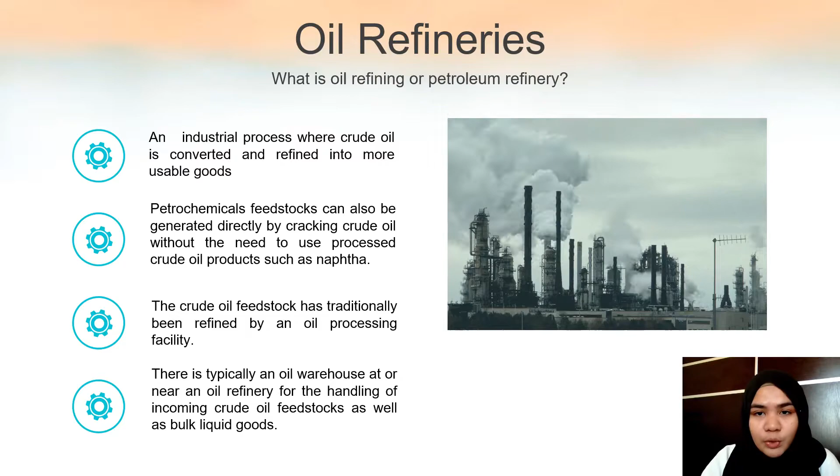Hi, I'm Farah. So first of all, allow me to explain what is oil refineries. Oil refineries is an industrial process where crude oil is converted and refined into more usable goods. It is considered an essential part of the downstream side of the petroleum industry.

The project chosen for our assignment is one of the biggest investments of Petronas, which is Refinery and Petrochemical Integrated Development Rapid Project. It is along with other related facilities that are part of the PIPC, which is Pengerang Integrated Petroleum Complex. This is a joint venture of Petronas and Saudi Arabia National Oil Company, which is Saudi Aramco.

The project started in 2013 and finished by the end of 2019. The project has achieved a total of 8,600 jobs in the operational phase by year 2020.

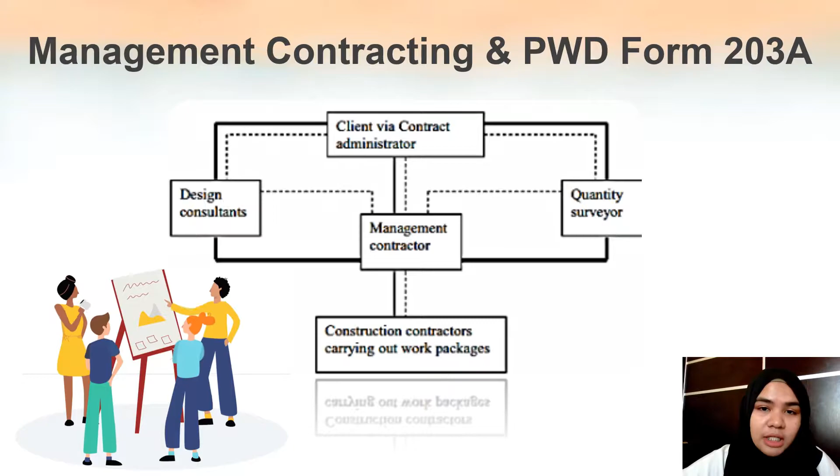The procurement system used for this project is Management Contracting and PWD Form 203A. A contract is between a management contractor and a work contractor. Specialized contractors and suppliers will of course be needed, contracted individually and managed by the management contractor.

Here is the location where the project has been built: Pengerang, Johor. The site was chosen because of its location along major shipping routes between the Middle East and China. With an area of 80 km, it comprises oil refinery, naphtha cracker, petrochemical plants, liquefied natural gas terminal, and regasification plant.

The project successfully finished with the cooperation of Petronas as main client, Tecnicas Reunidas awarded EPCC for refinery package, Fluor and Technip joint venture who supplied hydrogen reformers, Dialog Group Berhad, a leading integrated technical service provider to the upstream, midstream and downstream sector, while Royal Vopak, a Dutch multinational company that stores and handles various oil, chemical, edible oils and natural gas related products, and Axens, who provide naphtha hydrotreating, octanizing Prime K, R2R, and Prime G+.

Binapuri Holdings and Dasco are responsible for the civil works in the steam cracker complex. Samsung Engineering received EPCC contracts for its LLDPE and ethylene oxide ethylene glycol plants. ATB Group helps in providing ARDS reactors. Punj Lloyd, an Indian engineering procurement and construction contractor providing services for energy, infrastructure and defense sectors, while Johor Port Berhad supply manned services, manpower, equipment and system.

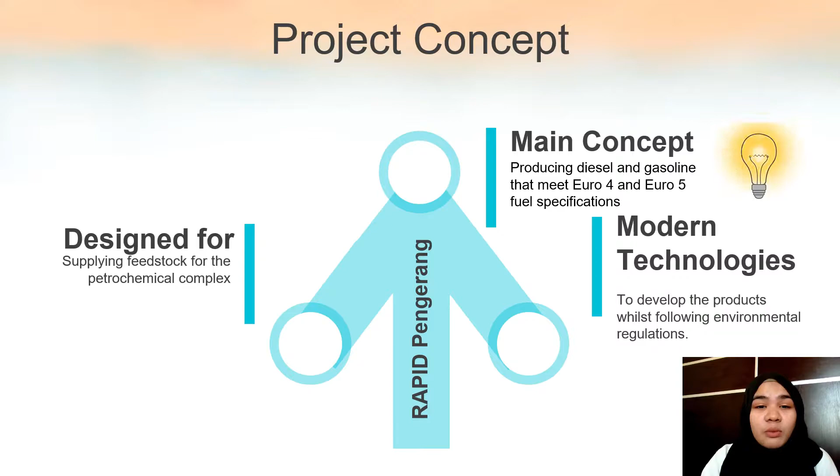The main concept of Rapid Pengerang is to produce diesel and gasoline that meet Euro 4 and Euro 5 fuel specifications using modern technology but still following environmental regulations. Next, I will pass to my dear friend Ellie to continue the technique used in constructing refineries.

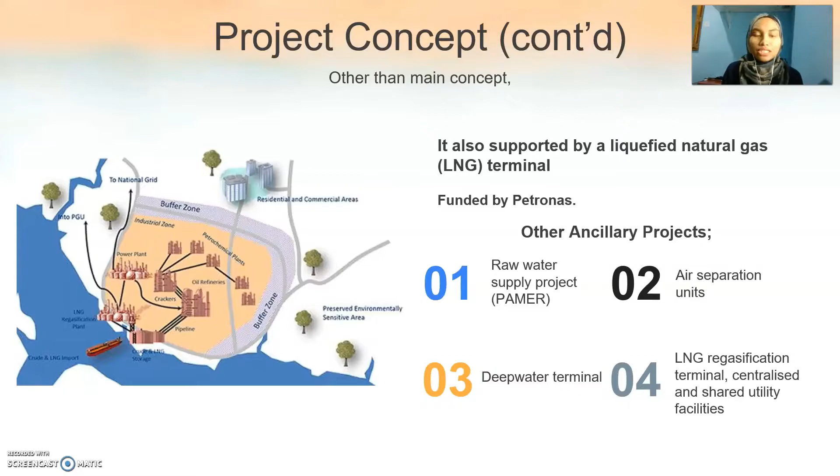Other than that, it is also supported by a liquefied natural gas LNG terminal which is funded by Petronas. Other ancillary projects are raw water supply project, air separation units, deep water terminal, LNG regasification terminal, centralized and shared utility facilities. This is the basic refining flow.

There are three main sectors in the oil and gas industry, which is upstream, midstream, and downstream sector. Upstream sector is located at sea inside the national border. The main part of this sector is exploration, drilling, and the production of crude oil. It is a process from getting a raw material to a refinery.

Midstream sector involves the transportation, storage, and gas processing. Pipelines are the most economical method to transport crude oil across long distances. Storage tanks will be used to store the petroleum product, while depleted reservoirs will store the natural gas.

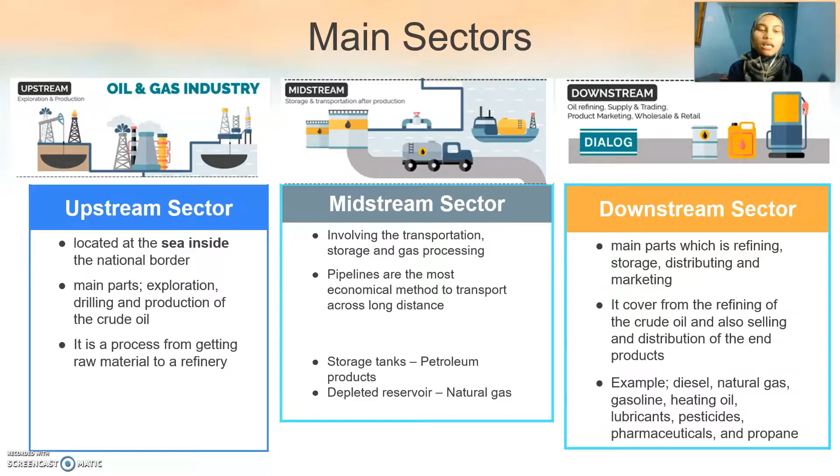Lastly, the main part of the downstream sector is refining, storage, distributing, and marketing. It covers from the refining of the crude oil and also selling and distribution of the end product. Examples are diesel, natural gas, gasoline, heating oil, lubricants, pesticide, pharmaceuticals, and propane.

Drilling oil requires drilling through the layers of the earth's surface to reach hydrocarbon deposits. Drilling takes place onshore, below the earth's subsoil, and offshore, below the seabed.

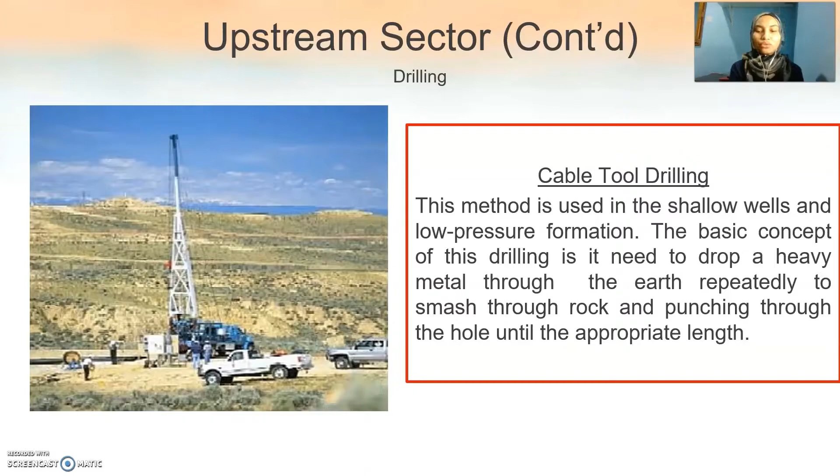There are two techniques for drilling. First is cable tool drilling, used in shallow wells and low pressure formations. The basic concept is to drop a heavy metal through the earth repeatedly to smash through the rock and punch through the hole until the appropriate length.

Next is horizontal drilling. Horizontal drilling is more flexible, allowing natural gas exploration that is not otherwise feasible. On the surface it has a vertical well, but beneath the surface the well inclines so that it runs parallel to the natural gas formation.

This is the technique for pipeline installation. Firstly, we construct the staging area, which should be clear, with the storage yard placed along the proposed right-of-way. Next, clear cutting the right-of-way: trees are cut and burned, and a stump grinder removes the remaining tree stumps. Then, excavating the trench for the pipeline after site clearance is done. Next are pipe transport, stringing and assembly, obstacles, and testing and restoration.

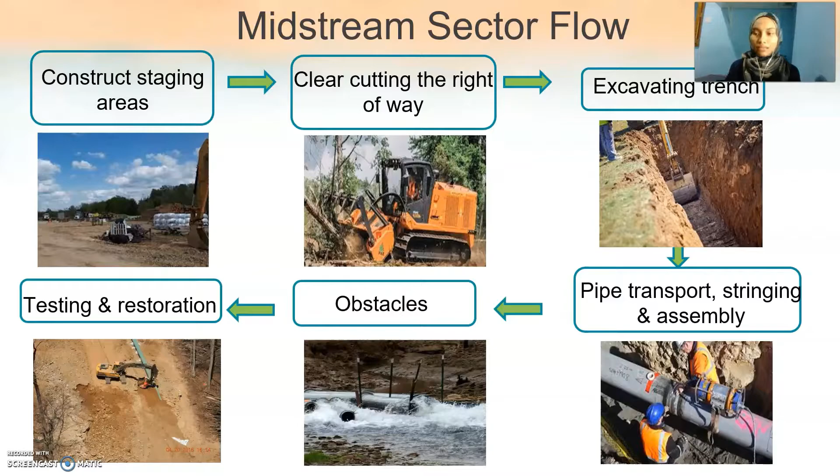Pipe transport, stringing, and assembly. When the trench is finished, pre-coated pipe lengths, usually 12 meters, are moved from the storage area to the right-of-way. The pipe parts are welded together, sandblasted, and epoxy coated at the welded joint to avoid corrosion. The welding joints are then tested with X-rays to ensure their consistency. The linked pipeline is then lowered into the trench.

Obstacles. Pipelines may cross natural bridges, highways, waterways, or wetlands. Under these barriers, pipelines are usually built either by boring for shallow depth or by using horizontal directional drilling (HDD) for deeper positioning. Each challenge involves a specific approach and order of action.

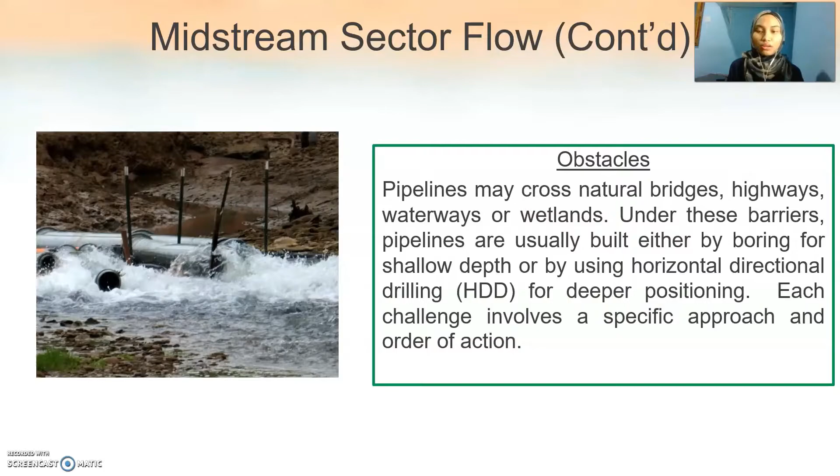Lastly, testing and restoration. Once trenches are dug and pipes are transported to the staging area prepared by the construction workers, pipes are laid down beside the trenches. Pipe sections are then bent using pipe bending tools, welded together, sandblasted, and joints are coated to prevent corrosion.

We proceed to the methods to test the tank foundation.

As Pengerang Rapid has many huge storage tanks, it is vital to test the tank foundation, which is the base to support the weight of the tank and contain spillage. It is required to test each 0.3 meter thick layer of placed and compacted material using one of these methods: nuclear density gauge method, core cutter method, sand replacement method, and plate load test.

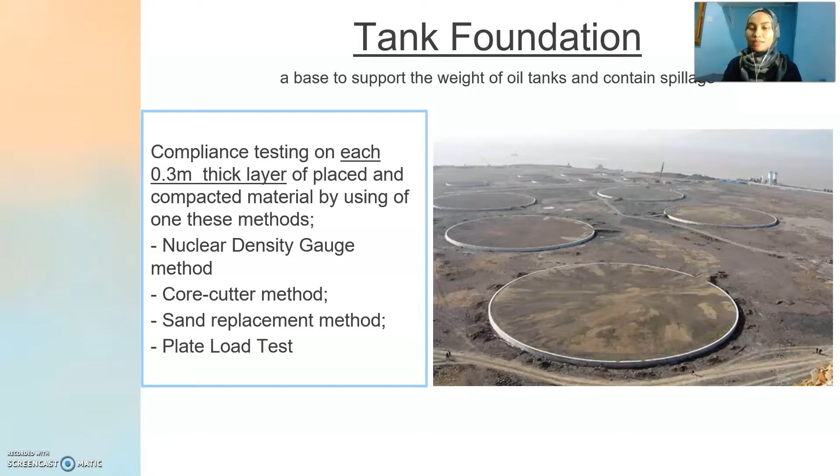Nuclear density gauge method. Nuclear densitometry is used to determine the density and inner structure of the test material. It consists of a radiation source which emits particles and a sensor that counts the particles obtained, whether reflected or passed through the test material.

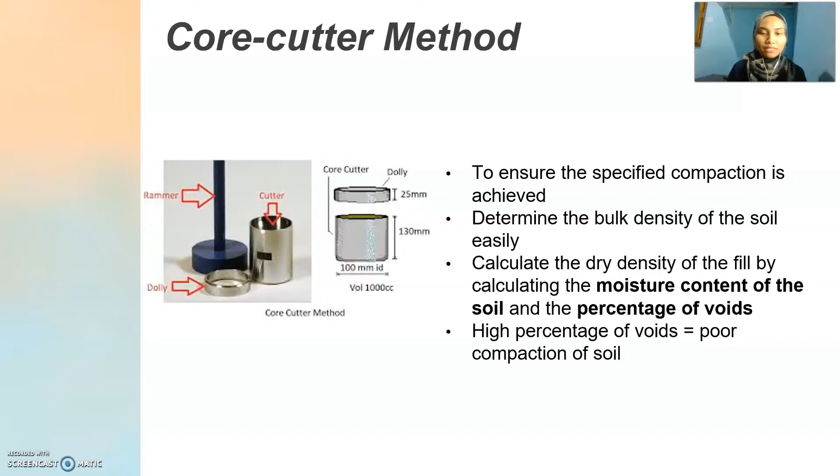Next is the core cutter method. This method ensures the specified compaction is achieved and determines the bulk density of the soil easily. It calculates the dry density of the fill by calculating the moisture content of the soil and the percentage of void. A high percentage of void indicates poor compaction of soil.

Next is the sand replacement method. It can measure the in-situ volume of the hole when the material was excavated, from the weight of sand with known density filling the hole. It can assess the in-place density of the compacted soil and specifies how similar the soil compaction is to the designated degree of compaction.

Lastly is the plate load test. It determines the ultimate bearing capacity of the soil and the probable settlement under a given load, and is suitable for selecting and designing shallow bases. The steps are: firstly, the plate is mounted at the desired depth, then the load is applied rapidly. For each load increment, the settlement is reported. If settlement occurs, the total load up to that point is calculated and divided by the area of the plate.

Therefore, one of these methods can be used to test the tank foundation.

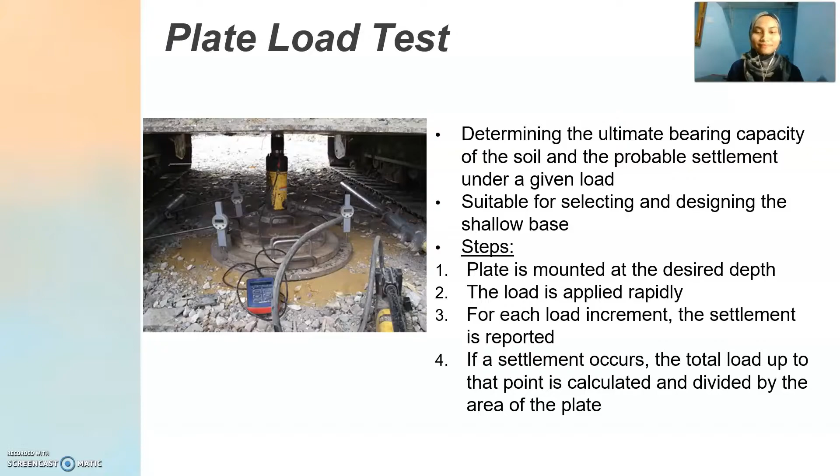Next, I will present about the types of oil refinery.

There are 4 types of oil refinery: topping oil refinery, conversion oil refinery, hydroskimming oil refinery, and deep conversion refinery. The type of oil refinery used at Rapid Pengerang is deep conversion refinery.

First is topping oil refinery. It is the simplest refinery configuration. It consists of tankage, a distillation unit, recovery facilities for gases and light hydrocarbon, and necessary utility systems such as steam, power and water, and a treatment plant. It can produce a large quantity of unfinished oil and is able to produce more than half of their output as residual oil. However, this type of oil refinery is not preferable because the demand for high sulfur fuel oil is declining.

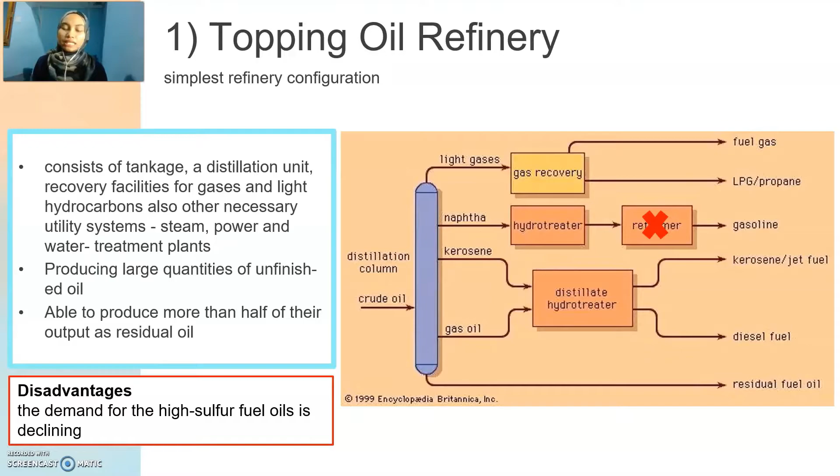Next is hydroskimming oil refinery. It consists of only atmospheric distillation, reforming such as naphtha reforming, and hydrotreating. It is more complex than topping refinery. It produces naphtha and gasoline and has the catalytic reformer, which generates higher octane reformate and hydrocarbon for hydrotreating units. However, this oil refinery produces a surplus fuel with no relative price and demand.

Next is conversion oil refinery. It is the most versatile refinery configuration. It consists of all the building blocks. It has a feature of gas oil conversion plant such as alkylation or polymerization unit, and coking units to reduce the production of residual fuel. It is able to produce 2/3 of its output as gasoline, high-quality jet fuel, liquefied petroleum gas (LPG), diesel fuel, and a small quantity of petroleum coke. The solvent extraction processes can turn into manufacturing lubricant and petrochemical units into polymers.

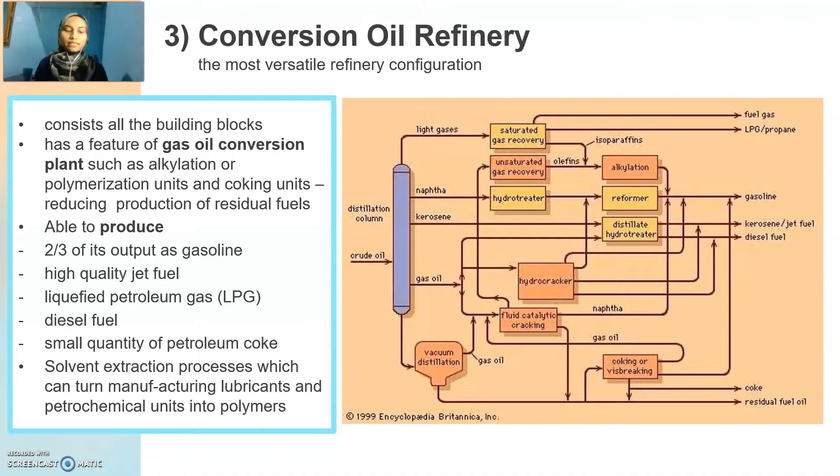Lastly is deep conversion refinery. It is a special class of conversion refineries. It has coking units to destroy the heaviest and least valuable crude oil by converting them into lighter streams, which will then serve as additional feed to other conversion processes. It has upgrading processes such as catalytic reforming that produce more valuable light products.

At Rapid Pengerang, the refinery has the capability to process 300,000 barrels per day and is complete with an isononanol plant, steam cracker, 3 sulfur recovery units, liquid sulfur storage unit, and sulfur solidification unit.

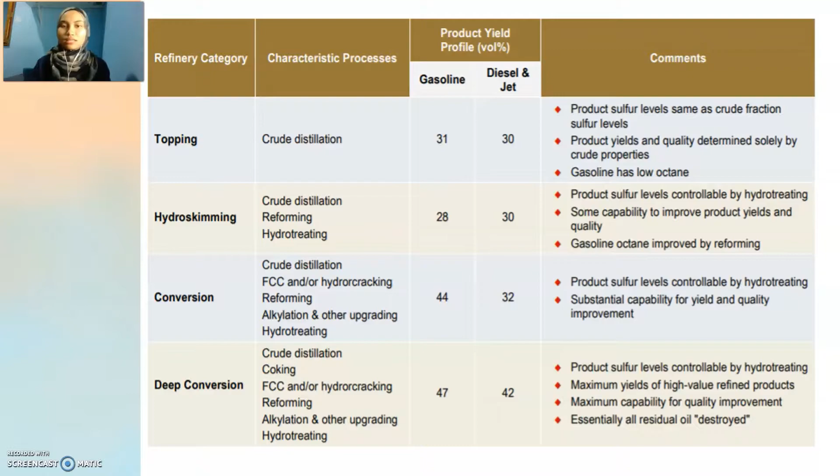This is a table comparison between the types of refinery, their processes, and the products produced. As we can see, the deep conversion refinery has the most processes and produces a higher amount of product.

Lastly is the technical specification. Rapid Pengerang has chemical facilities that produce hydrogen peroxide, C4 monomer, and other products. The chemical facilities are able to produce 250,000 tons of hydrogen peroxide, 220,000 tons of isononanol, and 110,000 tons of 1-butene. PCP, which is Pengerang Cogeneration Plant, has 4 cogeneration units which generate 1.22 gigawatt of electricity and supply power to the entire PIC complex.

All the facilities in Rapid Pengerang are required to make use of state-of-the-art technologies and should be designed for 20 years of design life. Lastly, all the plants should be able to operate 333 days per year.

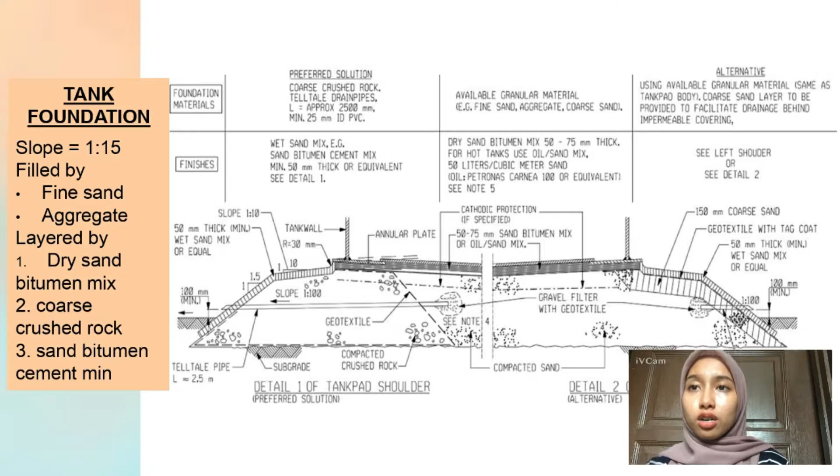As you can see in this drawing, there is a tank foundation drawing. From this drawing, there is a slope with a ratio of 1/15, filled with fine sand and aggregate. It is further layered by dry sand bitumen mix, coarse crushed rock, and sand bitumen cement.

Next is the horizontal vessel foundation or drum foundation, also known as horizontal drums. It is used as a standard precaution to ensure the stability of the foundation. At the top of the drum, a sliding plate is installed to reduce vibration and maintain structural integrity.

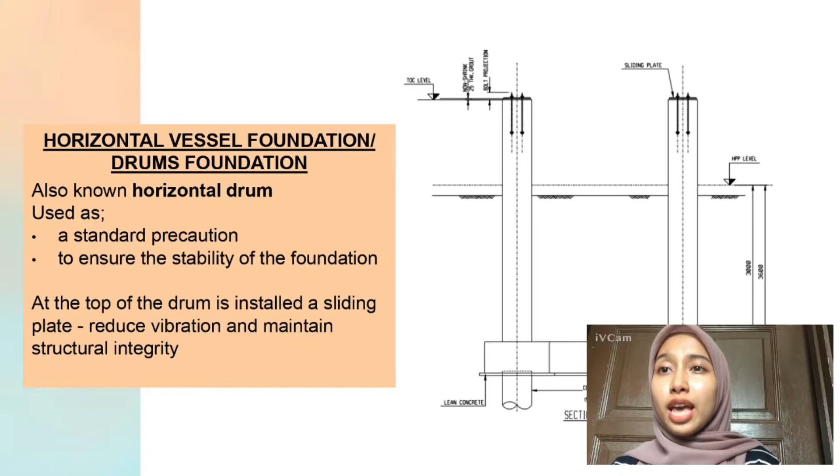Next is the steel structure. As you can see in the steel structure, the height of it is 36.7 meters and it has 8 levels, with the height per level being 4 meters.

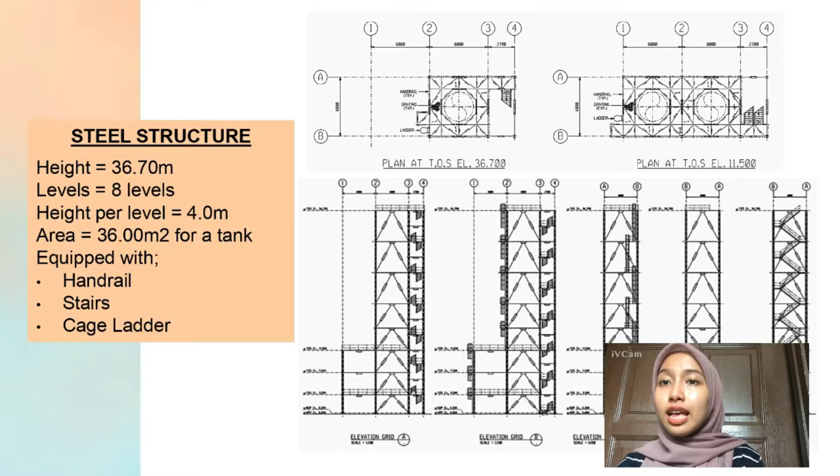And the area of it is 36 meters square for a tank. Moreover, for the steel structure, there is equipped with handrail, stairs, and cage ladder.

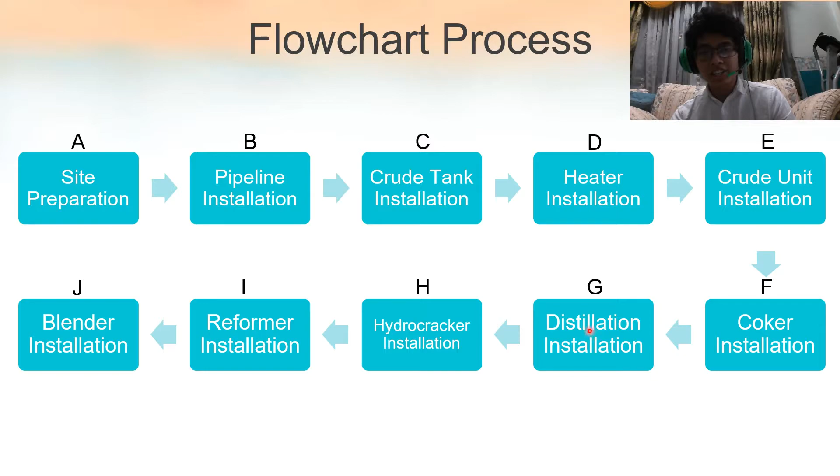So for now, I will explain about the process that occurs in oil refinery and how to build it. Firstly, we have the site preparation, which will be continued by pipeline installation, then crude tank installation, heater, crude unit, coker, distillation, hydrocracker, reformer, and lastly the blender installation.

First thing first is the site clearance. We will have to remove the topsoil, and then there will be an excavation for trench and pit. After the excavation, we will have to fill and do an embankment, and after that we will do a ground improvement technique on the soil to make it more stable and firm.

So for the site clearance, as you can see here, this is removing the shrubs and also the trees. We have to clear the area, clear the tree and such. We have to maintain information on what we dispose and everything, and to request an inspection form to calculate this.

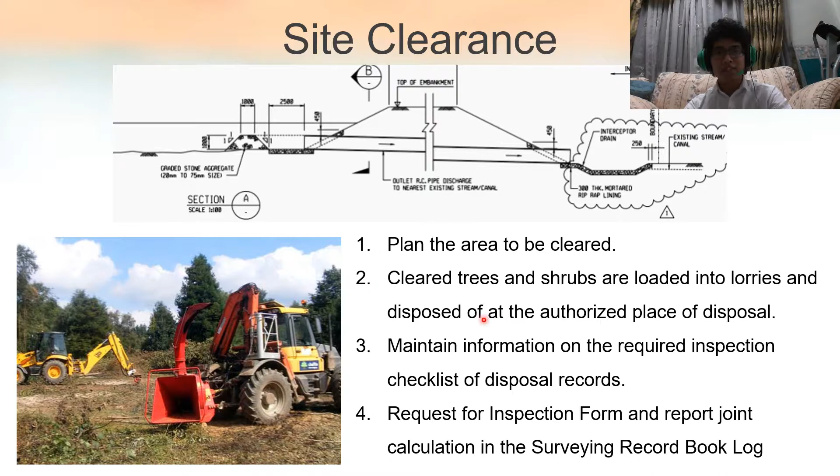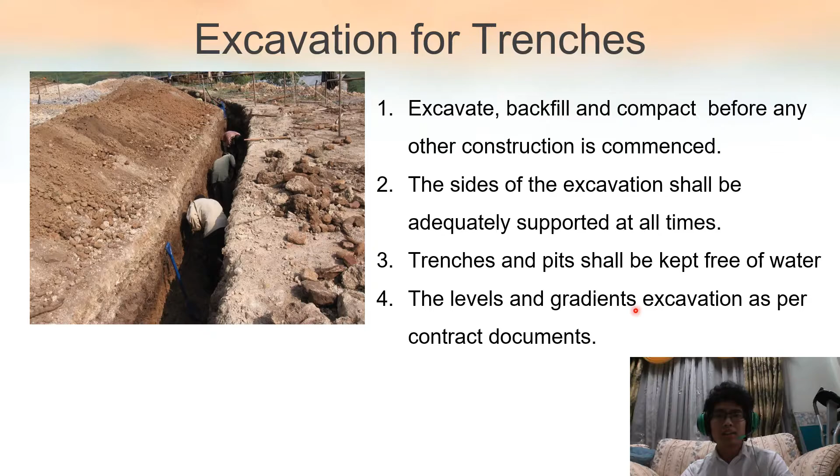And then excavation for trenches, we have to excavate, backfill and compact, like I said here. Of course, the sides of excavation shall be adequately supported at all times, maybe using wood and such for extra support. Okay, next is fills and embankments.

Like I said earlier, we have to find a suitable material or reuse the excavated materials that we get from trenches or the pits earlier, and then we have to deposit and compact them, not exceeding 250 mm thick.

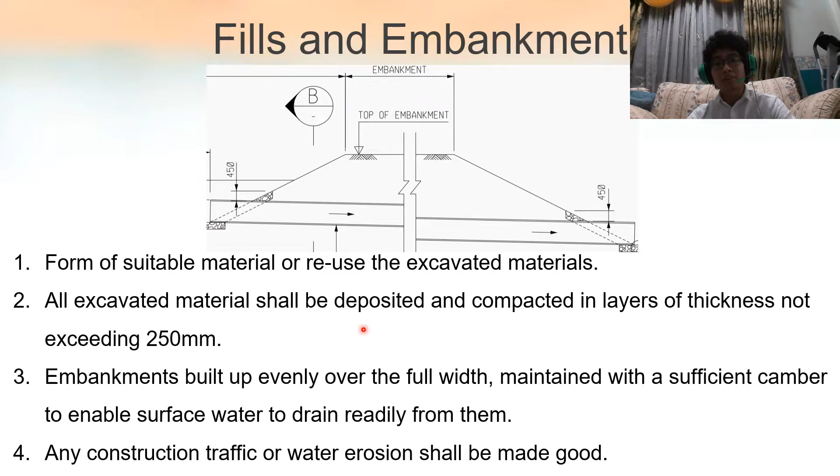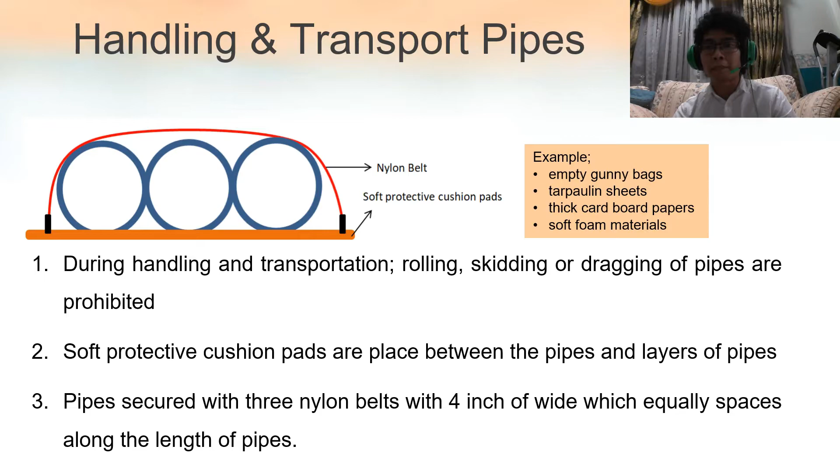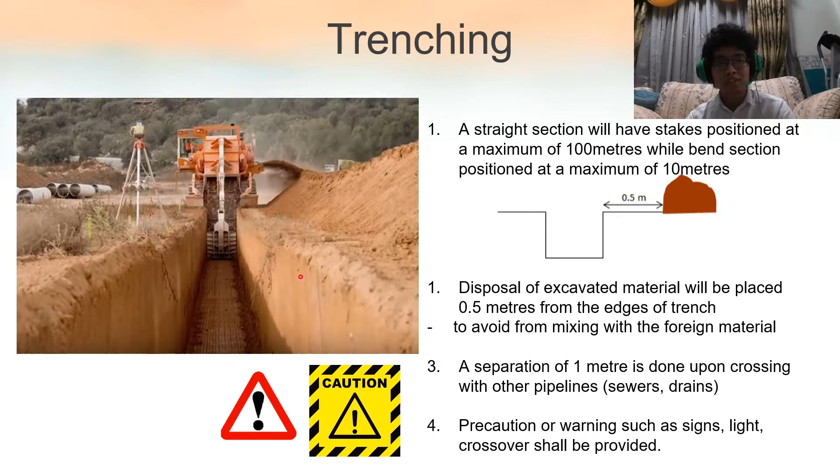Okay, so the next is trenching. Like I said previously, during site preparation, we have done trenching before. The purpose of this trenching is so we can lay down the pipes that we have set out just now, put in the trench. After that, we will of course install the pipes.

Painting is used to combat corrosion for the pipes, because the pipes are highly volatile and highly chemical as well because of the oil. Here you can see the table for what you should use for the types of liquids that might be affected, and this is the color that should be painted for the pipes.

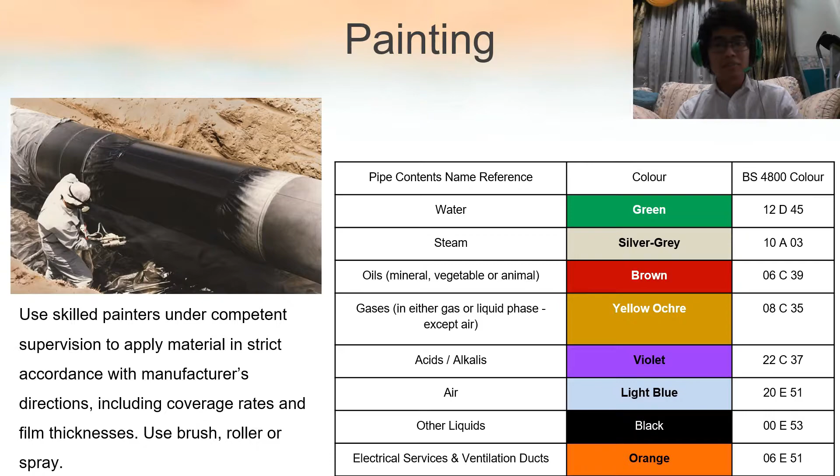After the installation of the pipe, we will have to test it to see if there's any leakage or such. For this we will use a pneumatic test, which will use a sonic detector or soapy water, and will be held for at least 10 minutes.

This is generally it. So for the next one, we will have to install the crude oil tank. The crude oil tank at RAPID Pengerang has a capacity of around 300,000 barrels. The main function of the crude oil tank is to store raw, unprocessed oil. This is the general notes for that.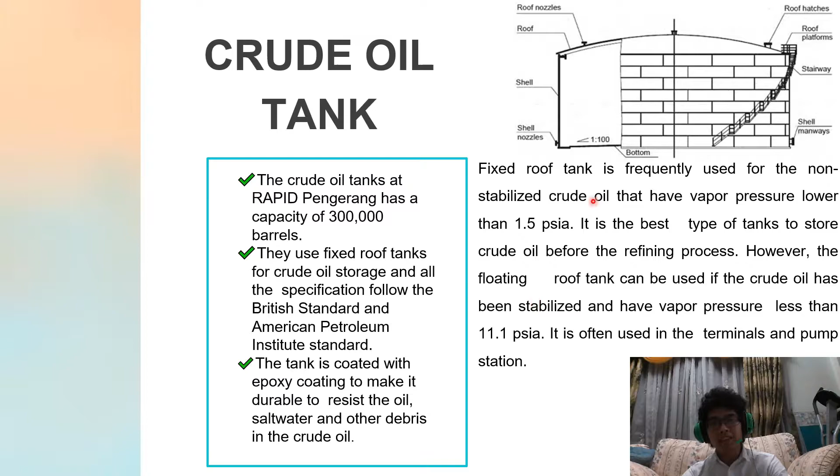A coating of paint, also called epoxy, is needed to maintain the structure from being corroded by the oil. For the next one, as you can see here, this is the tank foundation. We use geotextile compacted sand in order to further improve the stability of the soil.

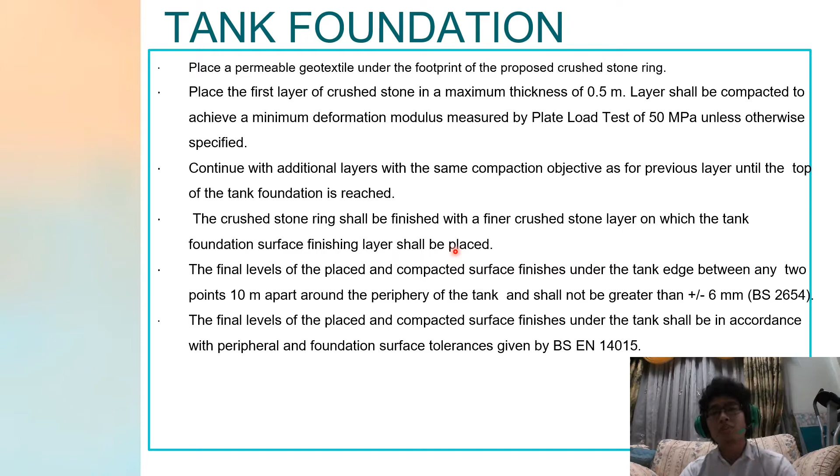This is actually shown more on the drawings before; this is just a general note of that. So this one you can see the general process - painting, and so on. And this one is the tank foundation.

You can see this circular dome here, being slowly erected like this. The first thing you have to do is build the foundations, and there are piles, based on the drawings Eamon provided before. The pilings here are reinforced concrete. The walls are made up, and then they slowly make the arch dome roof.

The specification for this is API 653, Tank Inspection, Repair, Alteration, and Reconstruction, which involves the inspection, maintenance, modification, and restoration of steel aboveground storage tanks used in the petroleum and chemical industries. As you can see here, these are the general specifications for the crude oil tanks.

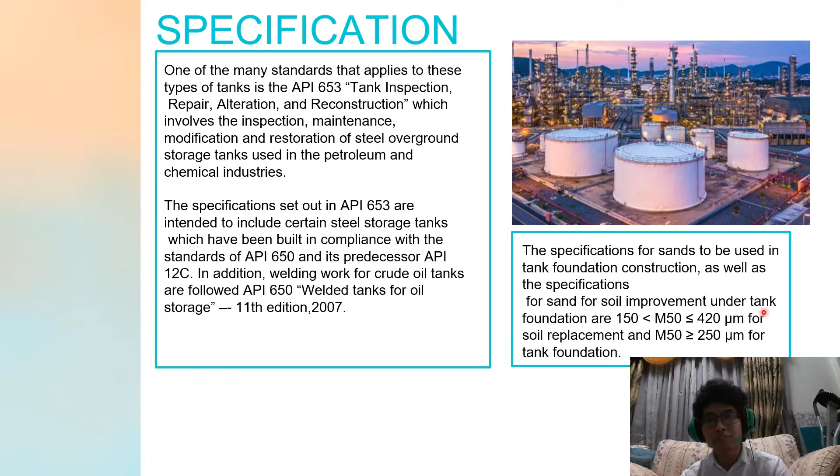Moving on to the next slide, we will have the crude oil furnace. This is linked to the crude oil tank, of course, to start the process of the crude oil refinery and to heat up the oil.

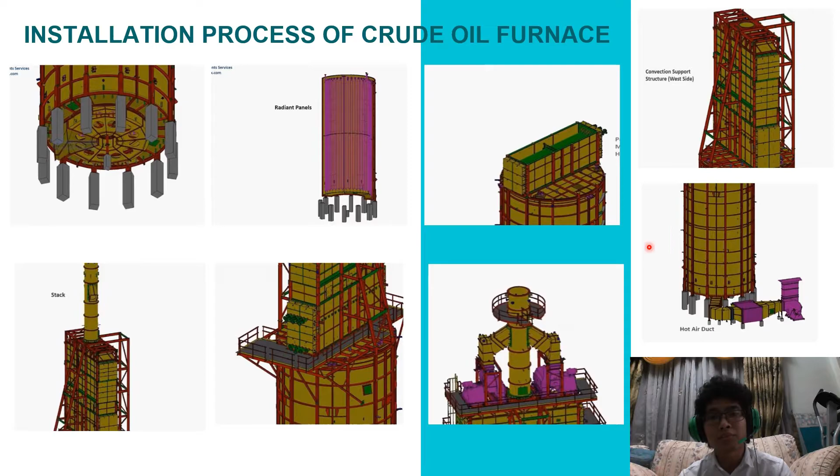Basically this is the same as the crude oil tank. We will have, as you can see here, a concrete pile, and then they will slowly erect upwards. This is the specification as well - it will use API Standard 560 and API Standard 530. This is basically the general specification for the furnace.

And also we will have the crude unit installation. Typically a special lifting operation is used on piles made of reinforced concrete poured 60 meters deep into the ground. Then the steel tower comes from the manufacturer in separate columns. The columns are welded together on site, equipped with external ladders and platforms to become a steel tower.

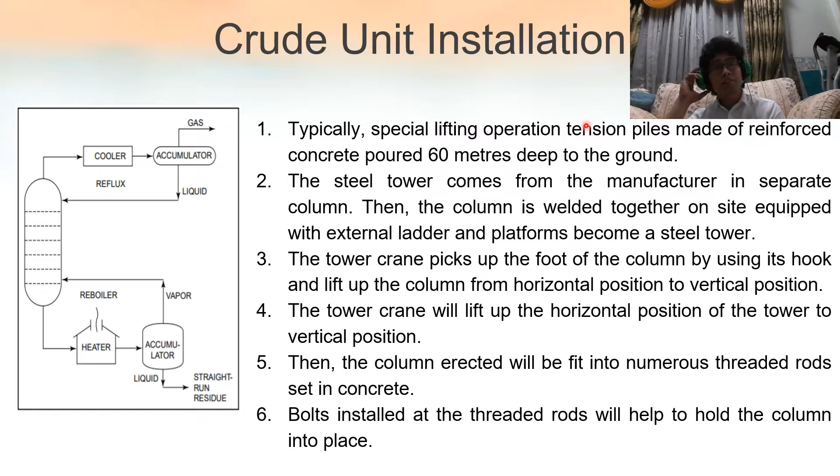The tower crane picks up the foot of the column using its hook and lifts it from horizontal position to vertical position. Basically, this is almost like it was precast from the factory, pre-made, so everything will just be unloaded at the site. Most of this was pre-made and installed on site, as I mentioned - it's been installed in factory.

Then, to allow the products to flow to the plant, valves are installed. As for the large valves, rotary valves are required. This is the crude unit installation specification - it has to function up to 410 Celsius to fully operate.

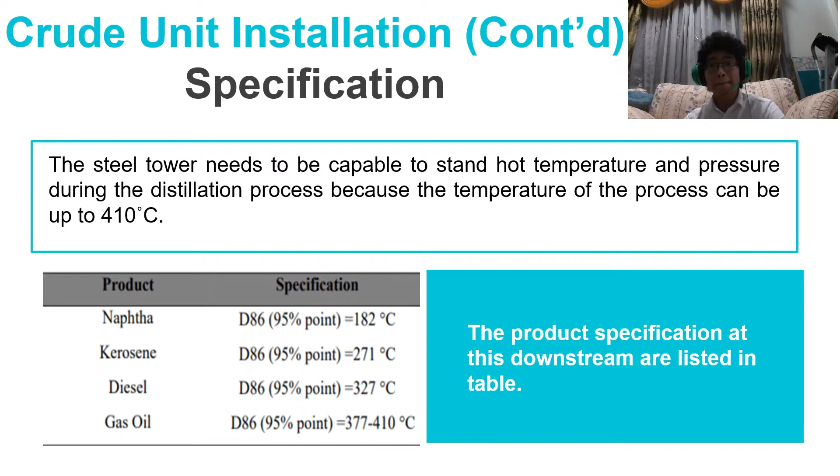Moving on to the next slide, now we will have the coker installation. It allows the products to flow to other plants, and valves are installed as well. As for the large valves, rotary valves are required. These valves allow for the discharge of the petroleum coke from the drum.

The steel structure is erected around the drum. As you can see here, this is the drum - you have 4 of these. This is the specification for it.

You can have a minimum of 4 drums and up to 8 drums, with a diameter of up to 10 meters and an overall height of up to 43 meters each. It should also be able to contain a very high temperature of a coker, that is about 538 Celsius each.

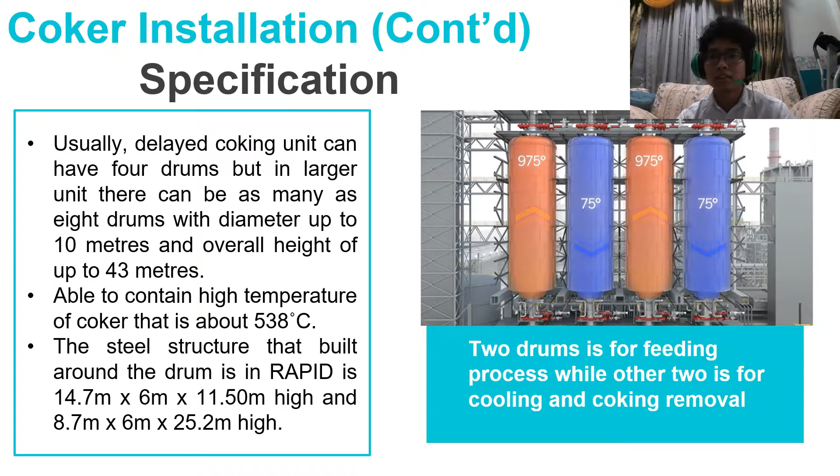For the steel structure that was built on the drum, this is the dimension as you can see here, and this is the function of each drum. So as you can see, this is the general drawing of the coker installation.

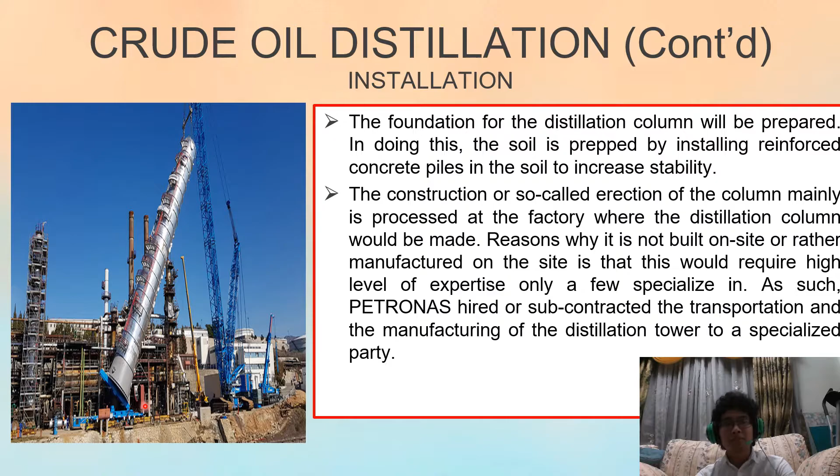The foundation will be prepared by reinforced concrete piles, and then most of the structure is pre-made from the factory, so they will transport it directly and connect it to the valves that were prepared beforehand. As you can see here, this is the plates that I mentioned, so the hot vapors will rise and the cooler liquids will fall.

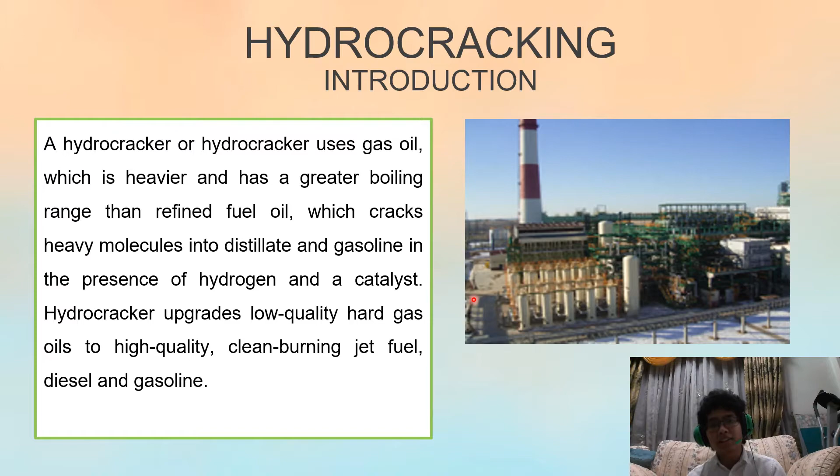Next we will move on to the hydrocracking installation. A hydrocracker uses gas oil, which is heavier and has a greater boiling range than refined fuel oil, which will crack the heavy molecules into distillate and gasoline in the presence of hydrogen and a catalyst. So basically this simply means that a hydrocracker upgrades low quality hard gas oils to high quality clean burning jet fuel, diesel, and even gasoline.

For the installation of the hydrocracker, it has the same concept as the crude unit and the distillation column, where the structure itself will be provided by the Fluor company. As you can see here, it has been shipped from overseas, so they will transport the whole thing from the factory to the site to be connected to all the previous valves and preparations made. This is the function that I have explained before.

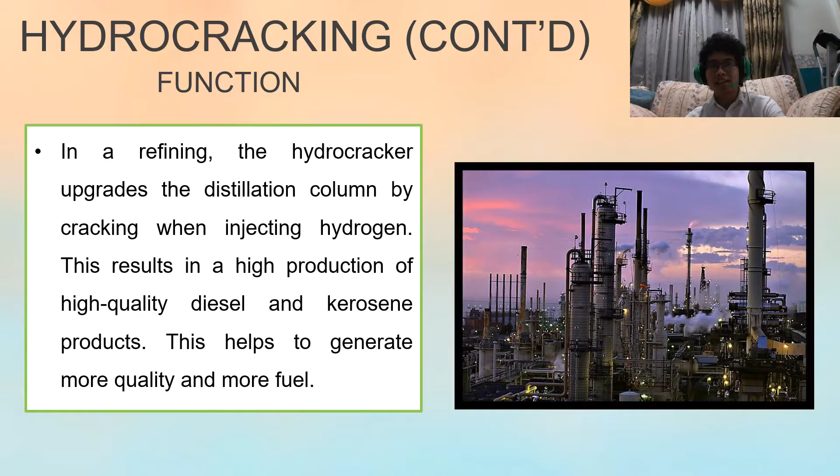Moving on, we will go to the reformer. It is required to calculate the load, size, and type of reformer to use, because it will differ for each and every refinery. This is because in the petroleum industry there can be 2 types of reformer technologies, which are the SR reformer and CCR reformer. The reformer is one of the most important pieces of equipment in the refinery process, and it is also an important unit for making high quality gasoline and preventing low octane heavy naphtha production.

Moving on to the next, we will have the installation procedure for the reformer. Like the basics, it is the excavation and site clearance as usual, and then we will construct the foundation of the reformer. We will install the concrete column, base column, beam, and cover plate. These concrete columns and base columns will be erected from the reinforced concrete pile from the floor, and then we will install the main and cover plate at the bottom plate panel of the reformer. Then we will weld the steel after erection of reformer tubes.

The pre-erected module panels start with two edge panels, then wall panels need to be guyed with ropes. We will need to install stiffening beams and auxiliary columns for the main beam burner platform. At the burner row, ceiling panel type 1 and type 2 were installed. Burner platform walkways have also been installed, which will need to have a staircase and observation platform at the burner platform. After that, pre-erected penthouse frames and bracing structures will be needed in this building.

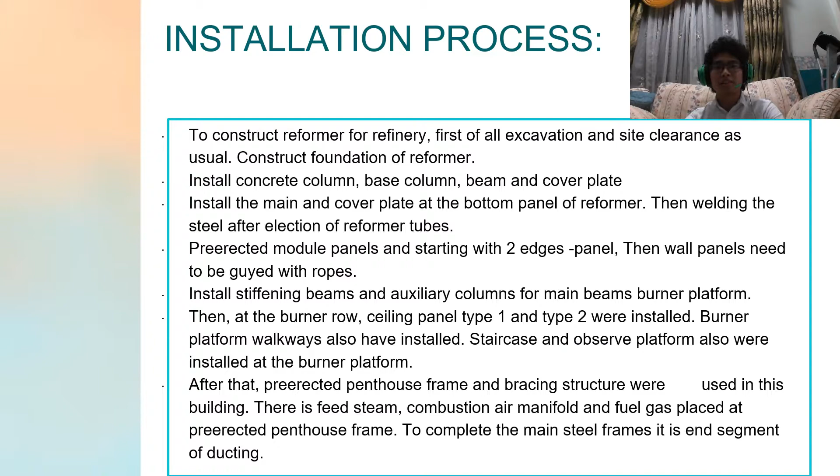This is the general notes of that. So for the specifications, the solution is as follows.

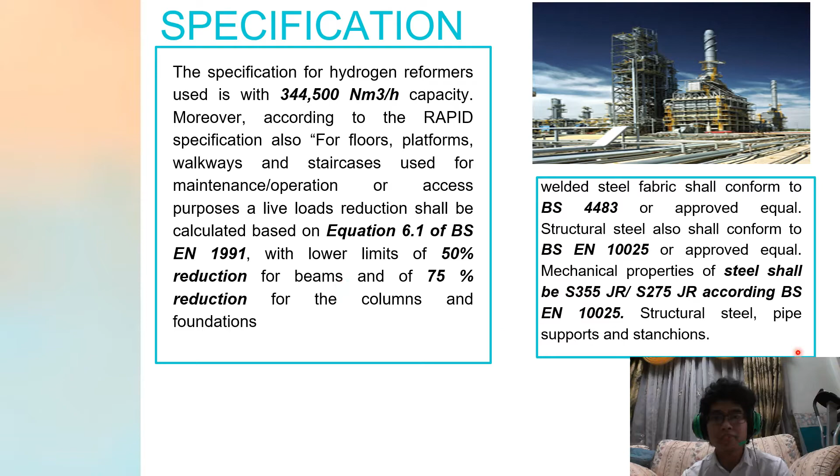It needs to have a capacity of 344,500 nm3 per hour, and according to the Rapid Pengerang specification, for floors, platforms, walkways, and staircases used for maintenance, operation, or access purposes, a live load reduction shall be calculated based on equation 6.1 of BS EN 1991, with a lower limit of 50% reduction for beams and 75% reduction for the columns and foundation. This is also the specification for the other ones.

Next we will come to the last component in the oil refinery, which is the blender.

Blender is one of the equipment in the crude oil yard, which is oil refinery process, like I mentioned earlier. Blender is also used in gasoline blending, which is a refinery operation that blends different component streams into various grades of gasoline. Moreover, it is used to assign all available blend components to satisfy the product demand and specifications, to minimize costs and maximize the overall profit.

So this is the installation process. We will, like the other units, need to construct blender foundations for the blending oil refinery. Then the system of the blender is delivered in a 20 feet HC container. After delivery, efficient handling of the equipment with lifting points prepared is a must. Then for plating all the steel from the place around the blender, it uses a jack, and it is erected by a lift jack machine to make a wall tank.

After that, vertical welding in PF or PG position is used by various welding methods, referring to the M&E drawing. During the welding work, there is a welding station to protect the equipment and welding processes from harsh weather and harsh conditions. Then we will need to install the plate above the roof structure using a lifting device, and this step is repeated until the wall reaches the proposed height of the blender.

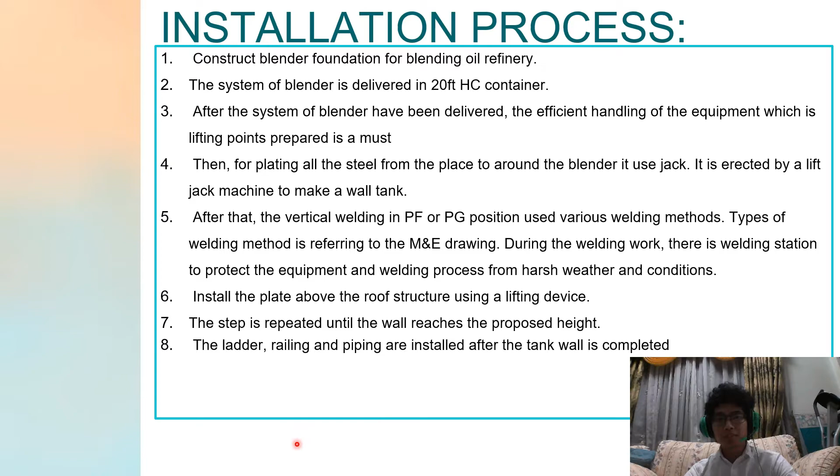Okay, and then we will install the ladder, railing, and piping after the tank wall is erected. So this is the general specifications for the blender in oil refinery. Vibration analysis is required for elevated machinery, and also dynamic analysis, and roof inspection as well. This equation 6.1 of BS EN 1991 is quite the same as the one before this.

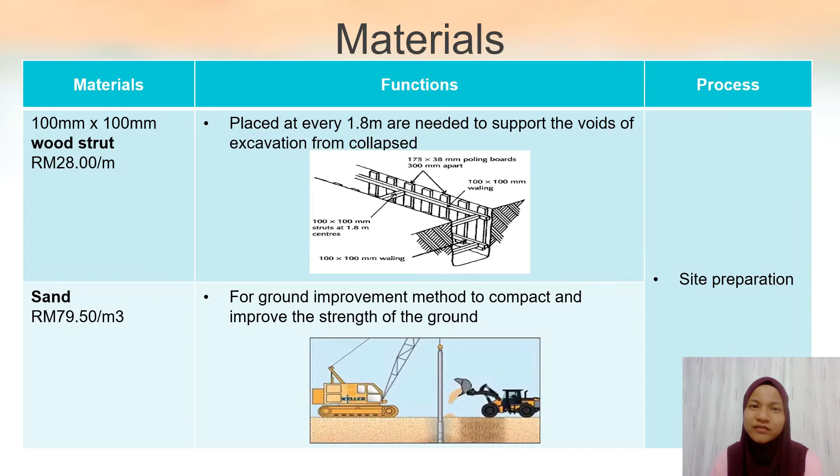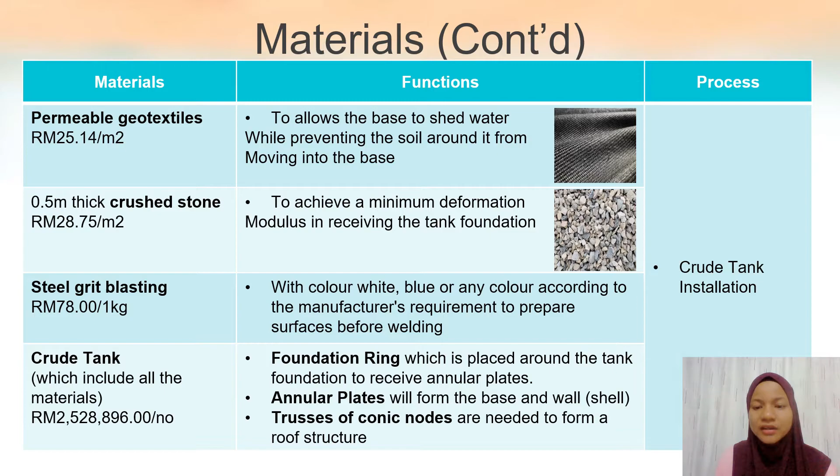For the crude tank, it will consist of a foundation ring, annular plates, and trusses of conic nodes. The foundation ring is placed around the tank foundation to receive the annular plates. The annular plates will form the base and wall, which then forms the shell. Other than that, the trusses of conic nodes are needed to form the roof structure.

In processes such as furnace installation, there is material such as the furnace tank that allows breaking up of stream emulsion and separating crude oil from water and other foreign materials. Other than that, in processes such as crude distillation unit installation or CDU, there are materials such as reinforced concrete piles and the CDU itself. The reinforced concrete piles are used in most installations in the refinery. The CDU is used to separate light and heavy crude oil, but before installing the CDU or any other type of installation, 60 meter reinforced concrete piles are installed first whenever necessary, depending on the ground conditions.

Next, coker unit installation. There are reinforced concrete piles and coker unit. After the installation of the reinforced concrete piles, a strong foundation is achieved. This will allow placement of a drum which may have diameter up to 10 meters.

Next is crude oil distillation. The crude oil distillation unit allows isolation of products based on variation in their volatility.

In the process of hydrocracker installation, there are materials such as reinforced concrete piles and the hydrocracker. Installing reinforced concrete piles in the soil increases stability. The hydrocracker functions to upgrade low-quality heavy gas oils to high-quality, clean-burning jet fuel, diesel, and gasoline.

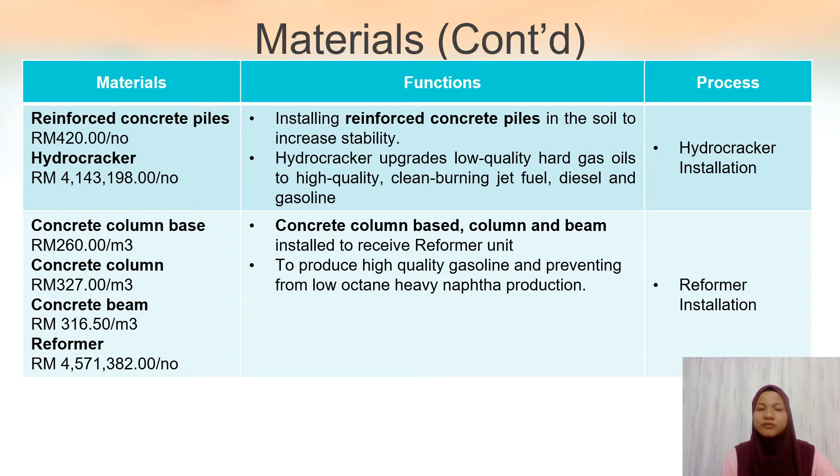Next, reformer installation. This involves materials such as concrete column base, concrete column, concrete beam, and the reformer. The column base, column, and beam installed are to receive the reformer unit. The reformer allows production of high-quality gasoline while preventing low-octane and heavy naphtha production.

Besides that, blender installation involves materials such as the blender. The blender will assign all available blend components to satisfy product demand and specifications.

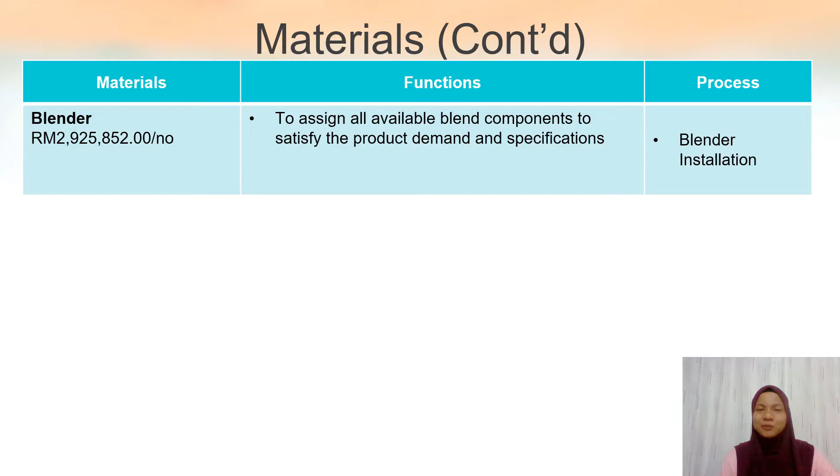Next is plant and machineries. There are a lot of types of plant and machineries used in this project. Some of them work interdependently, so we will see what types of plant and machineries are used.

In the process of site preparation, plant and machineries used include the motor grader, bulldozer, and excavator. The motor grader works interdependently with the bulldozer, and the bulldozer works interdependently with the excavator. The motor grader and bulldozer function to strip the surface of vegetation and debris, dump dirt at new locations, and finish the rough leveling of the site.

For the bulldozer and excavator, they will remove shrubs, bushes, and trees and help stack all the debris for site clearance. The bulldozer will remove the topsoil and push it into a stockpile to be spread for final grading, then transported using trucks to an authorized place. The bulldozer will also collect dirt and dump it into trucks to be transported to the desired area.

For the dump trucks, they are involved in all processes. They will load all the cleared trees and shrubs to be disposed of at the authorized place, and they will transport the dirt to the authorized place.

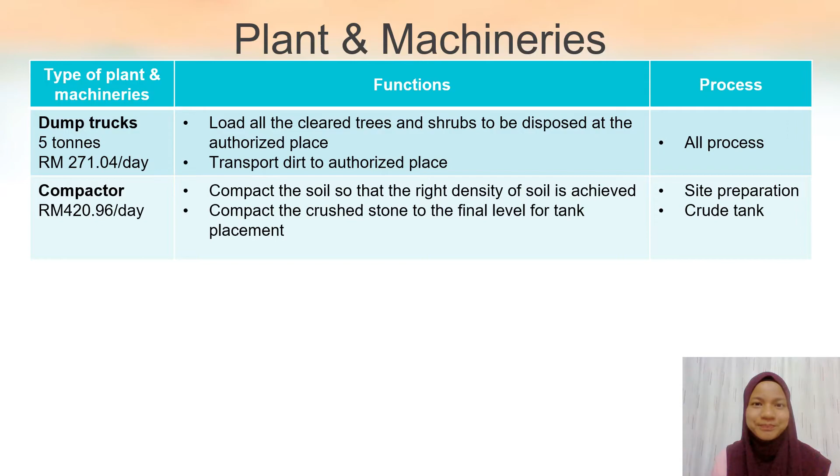As for the process in site preparation, there was a crane with a suspended vibrator used. This crane is used in ground improvement by the vibro compaction method to compact the soils, allowing structural load to be transferred to suitable levels in poor ground conditions. The penetration of the vibrator was aided by a water jet.

In other processes such as installation of the crude tank, furnace, crude distillation unit, coker, crude oil distillation, hydrocracker, reformer, and blender, machineries such as pile driver, tower crane, concrete mixer truck, and concrete vibrator are used. As mentioned earlier, reinforced concrete piles are used in most of the installation of the refinery, so the pile driver helps drive the precast concrete pile whenever necessary.

As for the tower crane, it helps lift the pile from horizontal to vertical position to be driven by the pile driver. It also helps transport concrete using a bucket and pour it to the desired area. This is because sometimes the concrete mixer truck cannot access certain areas, so they need the help of the tower crane's bucket to pour the concrete in the desired area.

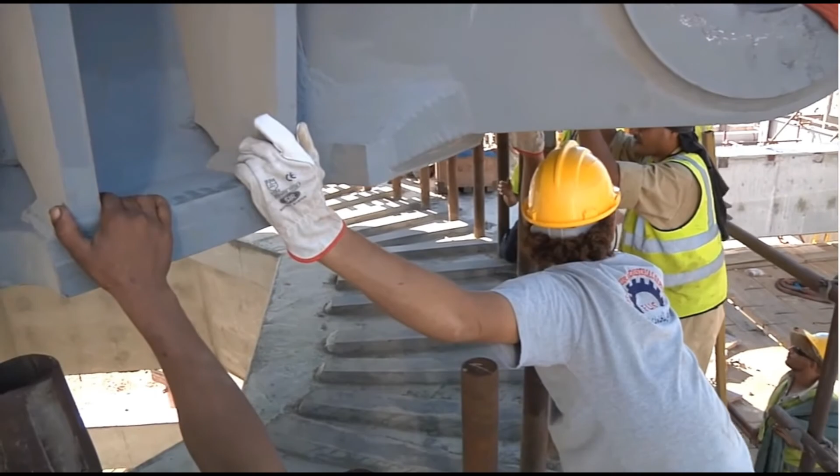Then comes that tense moment: the column is erected. Will the numerous holes fit over the numerous screws? Will the C3 splitter be completely released?

Besides that, the concrete mixer truck will carry the pre-mixed concrete and pour it for the foundation of the tank. The concrete vibrator will be used during the concreting, before the concrete sets, to help vibrate the concrete.

In crude tank and blender installation, machinery such as the lift jack machine is used to install and erect the plates around the tank. Besides that, in the blender installation process, a 20 feet container is used to deliver the system of the wall to the sites from the factory, because the size of the wall is too big, so the 20 feet container helps to deliver it to the sites.

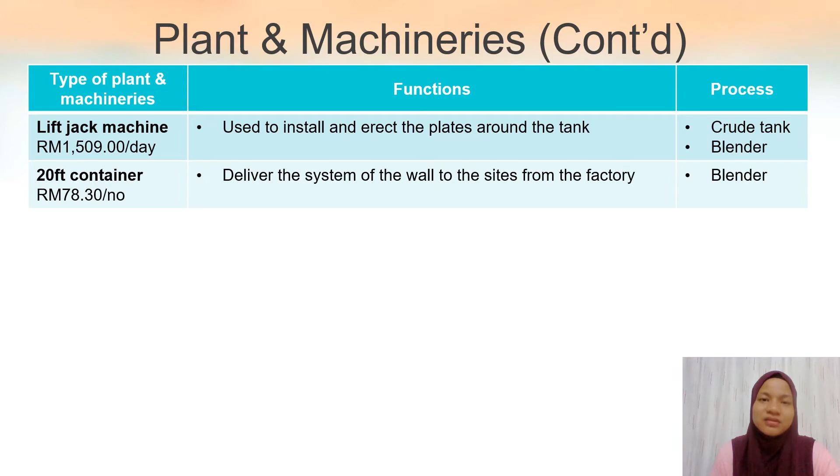Besides that, in the site preparation process, tools such as the nuclear density gauge, core cutter, and sand replacement tools are used in soil investigation. These tools are beneficial in performing soil investigation to determine the ground condition and what techniques can be taken to improve the ground conditions.

Besides that, in site preparation and crude tank installation, the plate load test tool was used. This tool determines the ultimate bearing capacity of the soil and the probable settlement under a given load. It also measures the specified compaction layer of crushed stone.

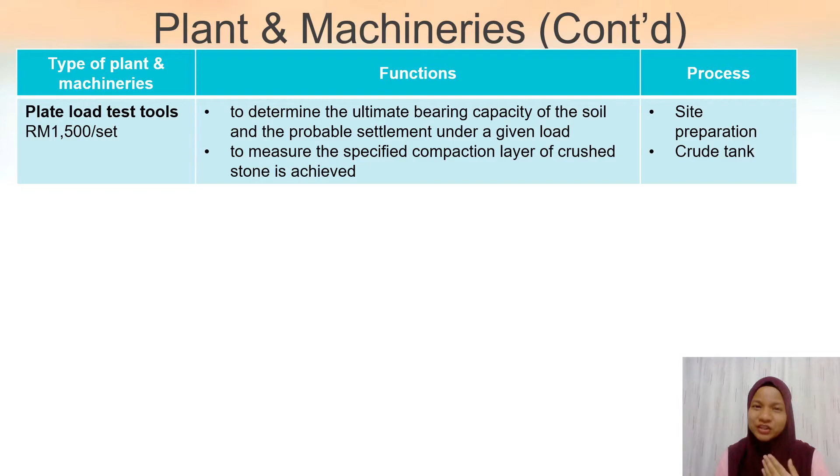Other than that, in most processes, the excavator and trucks were used. The excavator is used in trench excavation, backfilling, and pit excavation for foundation preparation. As for the trucks, they are used to transport the pipes, tanks, and tower to the sites.

As for the pipeline process, forklifts were used in lifting facilities such as pipes. Besides that, in most processes, machinery with multiple functions has been used, such as the backhoe, which helps to lay the pipe into the trench. It is also used for pit excavation for foundation preparation, and to load dirt and fill the dump truck before it is transported to the desired area.

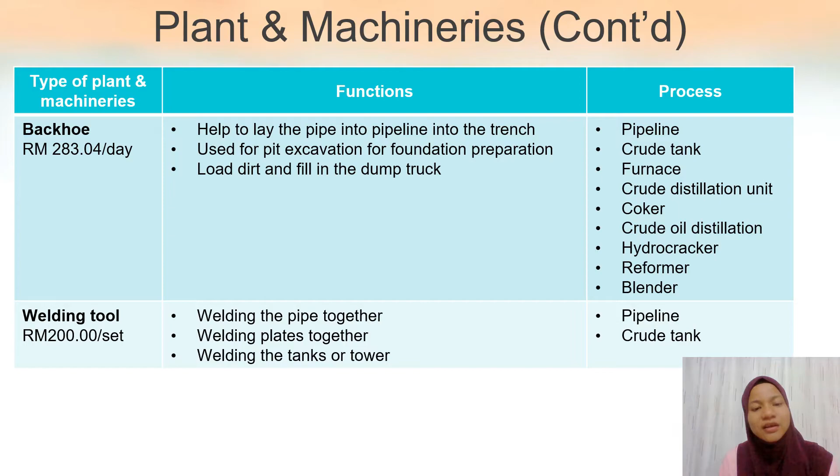Besides that, welding tools are used in the pipeline process and crude tank installation process, functioning to weld the pipes together, weld the plates together, and weld any parts of the tanks or tower.

Last but not least, in the pipeline process, plant, machineries, and tools used include the spraying pipe, X-ray, pipe bending machine, sonic detector, and odometer. The spraying pipe is used in coating the pipe with a designated color code, which helps to differentiate the type of pipe.

Besides that, X-ray is used to ensure consistency at the jointing. After welding, the test conductor will use the X-ray to ensure the consistency at the jointing.

Besides that, the pipe bending machine is used to bend the pipe to navigate it to the desired path, because the size of the pipe is too big for a human to bend. Other than that, the sonic detector is used to detect any leakage in the pipeline, and the odometer is used to test the entirety of the underground piping system, whether it is a successful or poor piping connection.

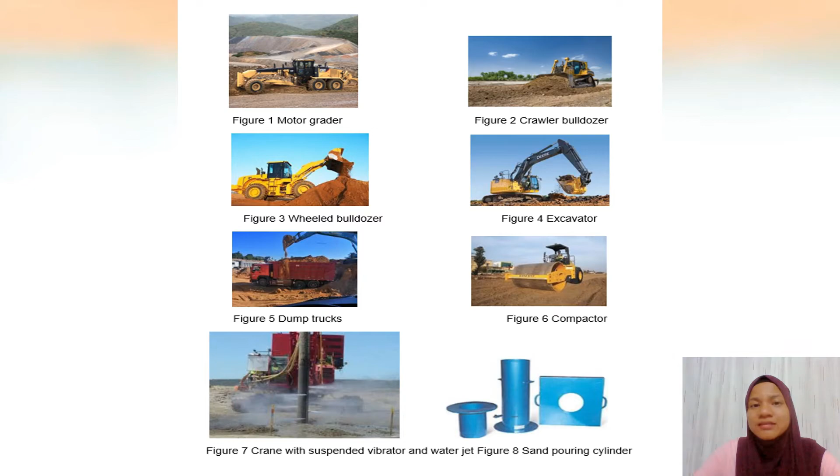In figure 7, this is a crane with a suspended vibrator and water jet that was used for ground improvement using the vibro compaction method. In figure 8, this is the sand pouring cylinder, one of the tools used in performing soil investigation. Besides that, these are pictures of the tools used for the soil investigation.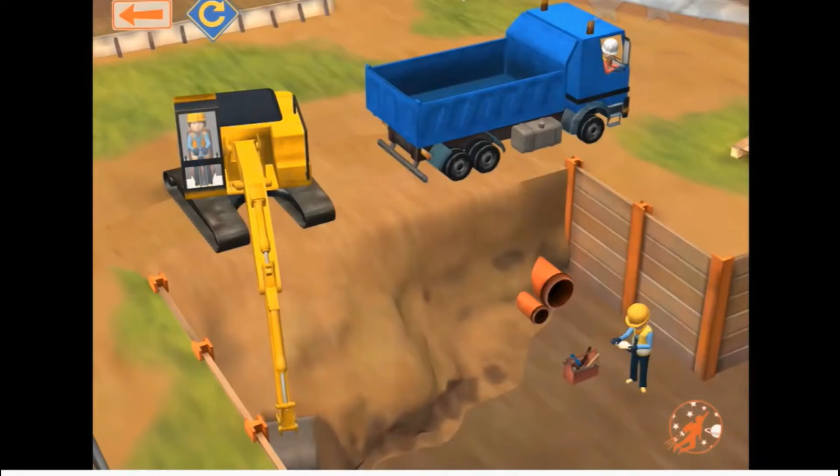With the existence of plant and machineries, it will not totally help the completion of construction. With the skills and energy, and the knowledge of labor in operating the machines, the completion of construction will be achieved. So this is the idea of how labor and plant and machineries work interdependently. With skills and advanced training, they are able to operate the plant and machineries very well, besides making planning and decisions based on judgment and knowledge they have. Thus, completion of construction can be achieved.

In all processes, there are a few types of labor that help in construction: general labor, semi-skilled labor, skilled labor, and supervisor. As for general labor, this type does not require any kind of skills and helps in simple work such as cleaning the site and transporting materials. They also assist the semi-skilled and skilled labor, and remain the same throughout the construction project.

As for semi-skilled labor, this type needs more skill than general labor and has to use their knowledge and judgment during working. Examples are truck drivers and those who help in site preparation. They also drive and operate equipment such as forklifts for lifting and laying facilities like pipes, drive dump trucks, and operate 20-feet container trucks.

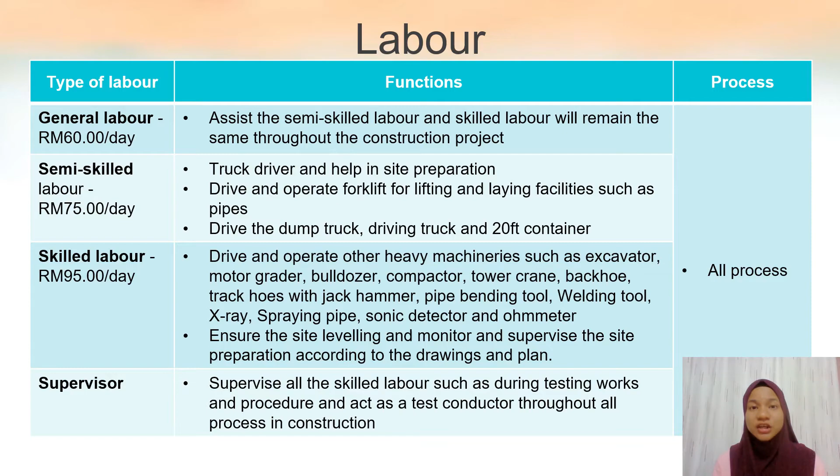Besides that, the supervisor. The supervisor supervises all the skilled labor, such as during testing works and procedures, acting as a test conductor throughout all processes in construction. In this project, a test conductor was required in processes such as site preparation, pipeline, and crude tank installation. Their function was to conduct necessary tests at each stage.

For example, in the pipeline process, the test conductor conducted a test to check the consistency of welding after pipe welding. Last but not least, there is a type of labor to erect formwork, cut, bend and fix steel bar, lay BRC weld mesh, and cast concrete. So basically, this type of labor is involved in concreting work, and they will be working in foundation activities or any concreting activities in most of the process.

So that is all from me.

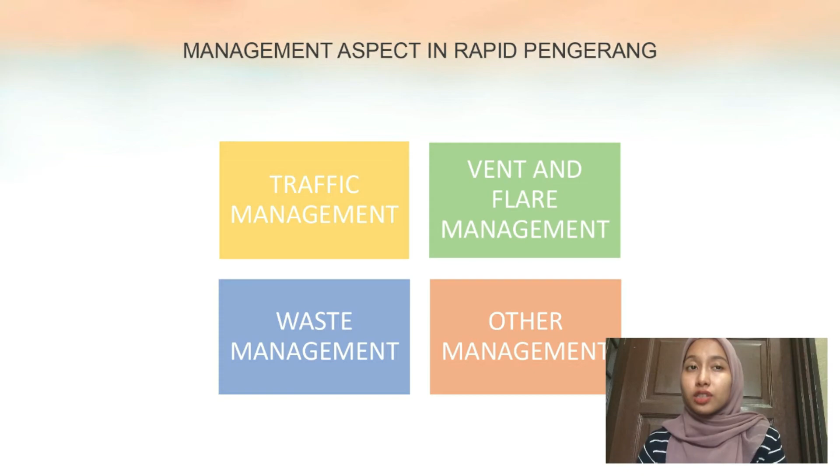Thank you. Okay, so next I would like to present to you about the management aspect in RAPID Pengerang. As you can see in the slide, there are 4 types of management aspects in RAPID Pengerang, which are traffic management, vent and flare management, waste management, and other management.

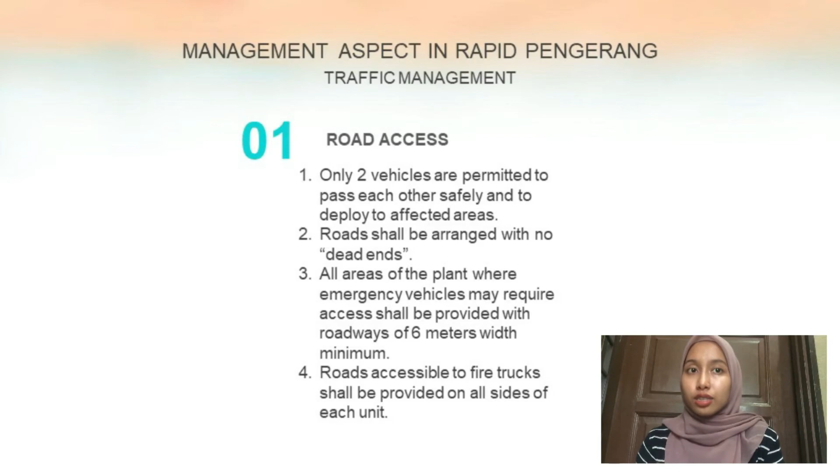First, I would like to explain traffic management. This can be divided into 2 parts: road access and escape ways. For road access, only 2 vehicles are permitted to pass each other safely and to deploy to the affected area, and all areas of the plant where emergency vehicles may require access shall be provided. Also for escape ways, 2 or more means of escape from raised platforms shall be provided. Access to overhead platforms shall be reserved in all cases where frequent access is required for operator and maintenance work.

Okay, so next is vent and flare management. Vent needs treatment following BAT process as a flare. A vapor recovery unit shall be established based on Malaysian regulation requirements for gas emissions, and it can release flammable or toxic gas from atmospheric storage, a tank, or an AOC network. And for the flare, hydrocarbon disposal to flare shall be via a collecting system.

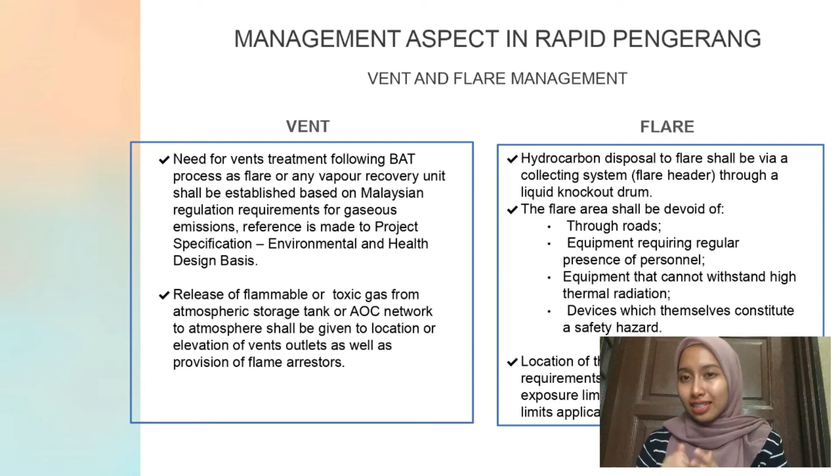And the next is waste management. Here, there are 4 methodologies developed in waste management. The first is to identify hazardous liquid which can cause marine water pollution for the environment in the plant, based on the associated MSDS. The second is to identify the equipment handling this liquid and also identify the potential spillage areas.

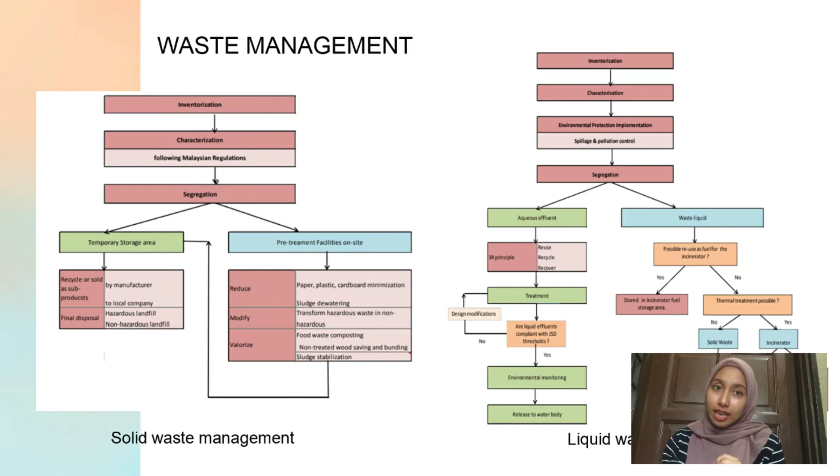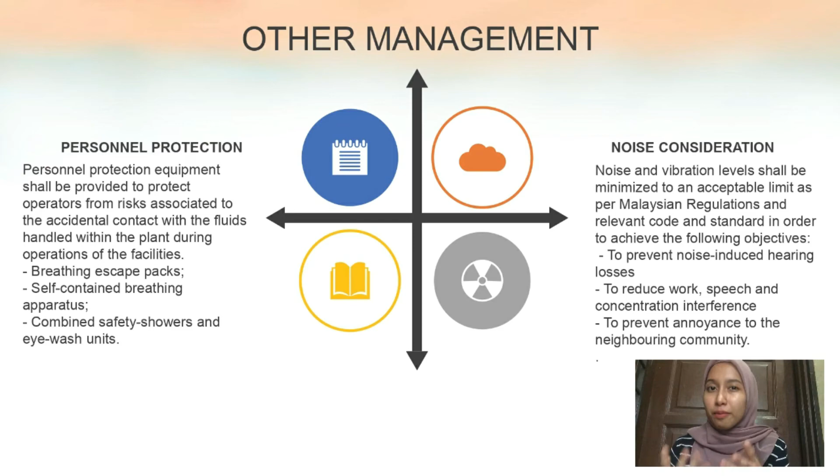For other management topics, we cover personnel protection and noise consideration. For personnel protection, equipment shall be provided to protect operators from any risk associated with accidental contact with the fluids handled within the plant during operations. For noise consideration, noise and vibration levels should be minimized to an acceptable level as per Malaysian regulations and relevant codes and standards, in order to prevent noise-induced issues, reduce work stress, and prevent annoyance to the neighboring community.

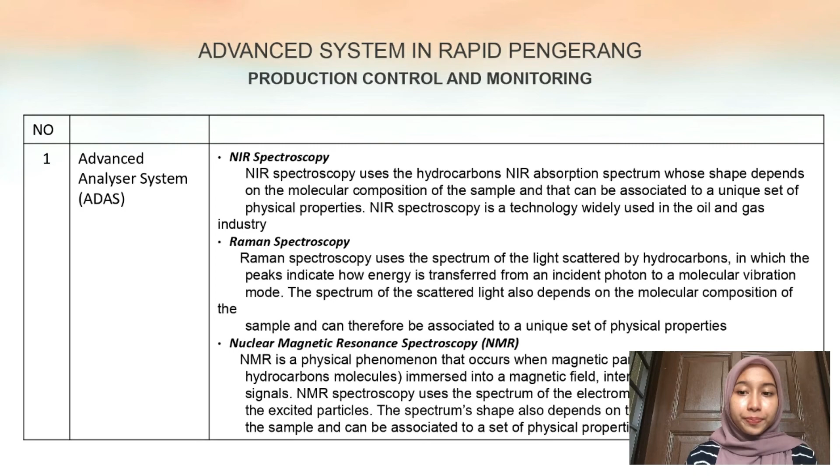Next is the blending control and monitoring system. The function of this system is to ensure that recipes, usually determined by the production, planning, and scheduling department, are properly implemented based on accurate data. It also optimizes the blend recipe to minimize quality giveaway while ensuring the finished product meets specification.

The fourth is the advanced process control system. The function of this system is to recognize all operational constraints and safety and environmental limits, maintain product quality specifications, maximize production, and mitigate or reject the impact of process, utility, and environmental disturbances.

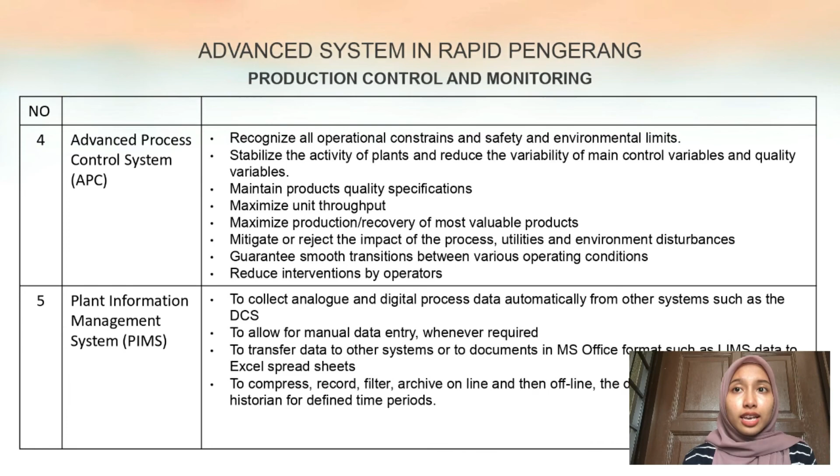The last is the Plant Information Management System, or PIMS. Its function is to collect analog and digital process data automatically from other systems such as DCS, and to allow for manual data entry whenever required. It also transfers data to other systems or documents, such as MS Office formats, like LIMS data to Excel spreadsheets. Additionally, it can compress, record, filter, and archive online and offline data in a centralized data historian for defined time periods. Next is the advanced information system.

The first is the Analyzer Maintenance and Data Acquisition System. Its function is to monitor the performance of selected online analyzers, detect and predict abnormal behavior through statistical analysis of measurement values from the analyzer.

The second is the Automatic Corrosion Monitoring System. This system monitors corrosion of selected equipment, pipes, and regions susceptible to corrosion in the plant.

The third is the Computerized Maintenance Management System. Its function is to identify, prepare, schedule, and archive useful information, and to collect and organize data to help produce planned and unplanned maintenance tasks. It also helps maintenance staff in their daily tasks by providing easy access to useful data, and facilitates documentation activities.

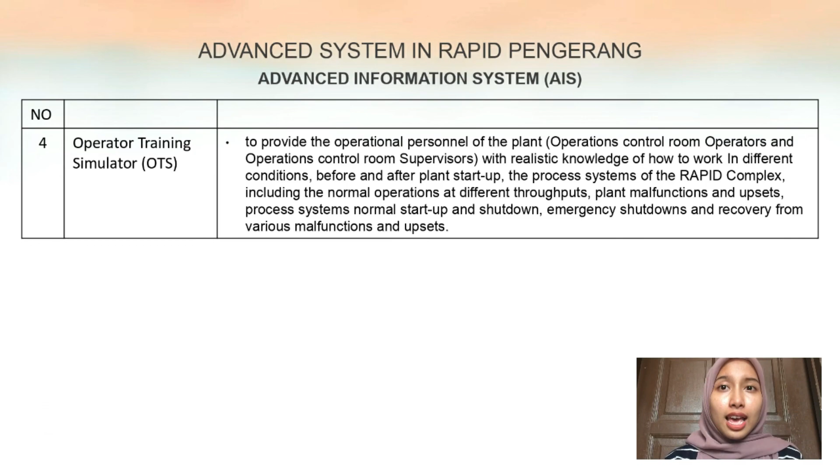The last is the Operator Training Simulator. This system provides operational personnel with realistic knowledge of how to work in different conditions before and after plant startup. The process systems of the RAPID Complex, including normal operations at different throughputs. That's all from me, thank you.